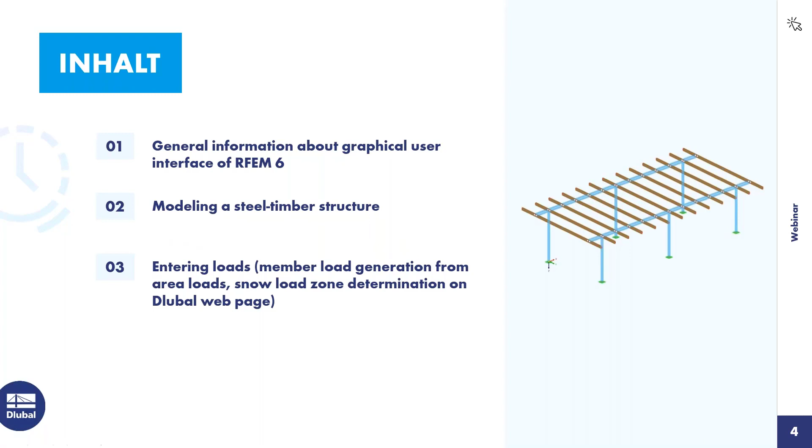Okay, then we turn to the program RFEM 6. I start left above, File, New. You can also use this button on the left side above. Then the first dialog, the base data, is opened. I enter a model name, I call it shelter or roof, doesn't matter. It's a 3D model.

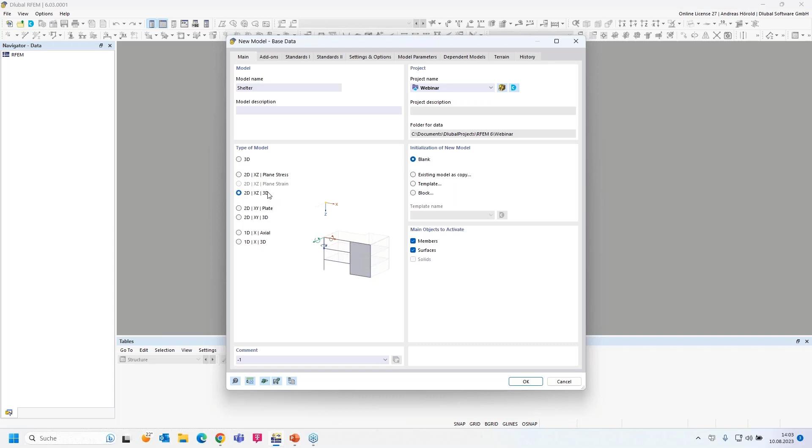New in RFEM 6 is the 2D model and the consideration of 3D internal forces. It's better explained with the 1D model. For example, with a 1D beam you can consider My or VZ, and with this new option you can also consider torsional moment and MZ. That's for users who already know RFEM 5 and are interested in RFEM 6.

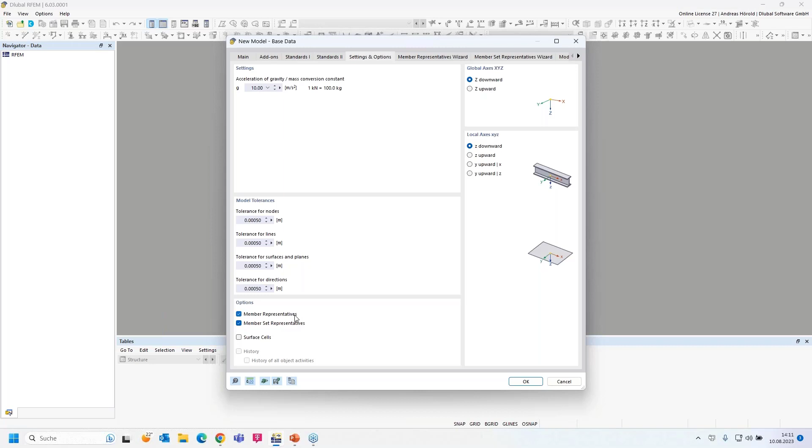Imagine we have got 6 columns, but we will design only one member representative, meaning only one column. In our case, we have got 3 columns with the same length, and that's why we have got one member representative for these 3 columns. But we will come to that later in the second part of the webinar.

So that's all the options for the member representatives. We want to use them for the steel design and the timber design. The same for the member set representatives.

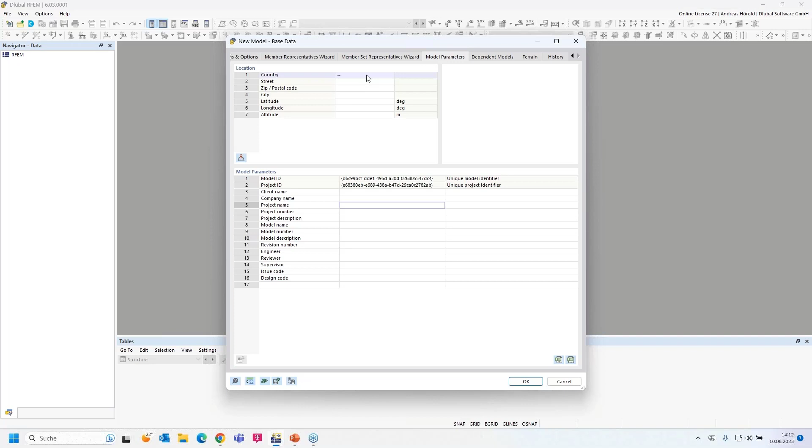So then we select the dialog member model parameters. You can see here the member model parameters. You can enter any text here. You can load the location of your construction to use it for the different load wizards, snow load wizard and wind load wizard. I will do that later in the program.

So then dependent model, it's not interesting today. And also the terrain, you can define different terrains. Then the history, it's empty at the moment because it's a new model. Okay, I can leave the dialog with OK.

And a new space for the modeling is available now. So for users that already use RFEM 5, you can see it's nearly the same interface, with more than some new functions. But if you want to create a node here on the left side, or a line, or a member, or a nodal support, that's the same workflow as in RFEM 5.

But what is new? That's the Dlubal Center. I opened the Dlubal Center. That is the project manager. Now you can see that's the current project, that's our empty model shelter.

I already tested it, that's the finished model, and those are the models from the German webinar that I presented last Tuesday. Okay, those are models from previous webinars. Or where are the examples?

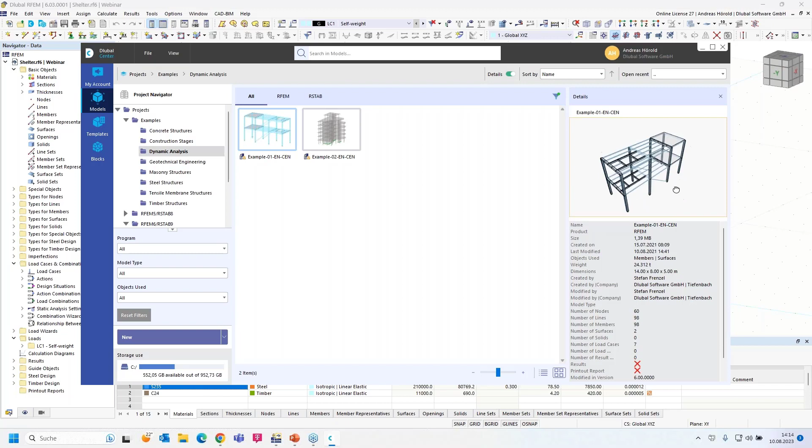For example, construction stages, dynamic analysis. You can see a 3D model on the right side here. Then the model information, number of results if you have got results, number of nodes, number of lines, and so on.

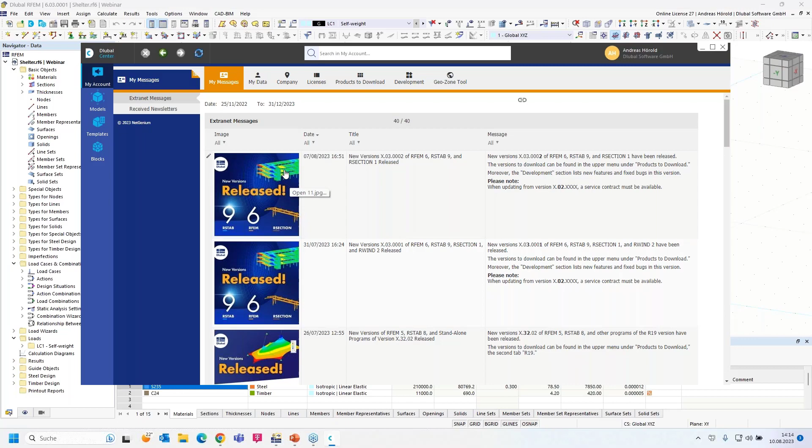So, okay, then we can turn to my account. Then the Dlubal extranet is opened with the extranet messages, your data, the company data, the licenses, products to download, and the new program generation, and also the old program generation. And what's quite interesting to you is the development page here, where are the implemented features.

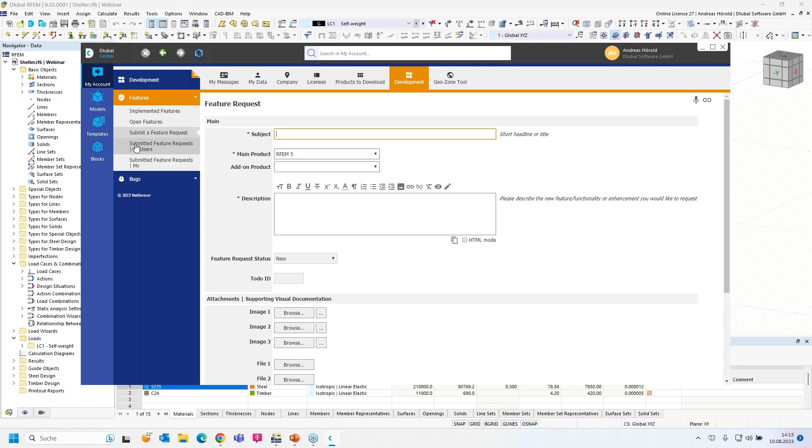For example, you can select for timber design, or display all, or concrete design, for example. You can submit a feature request. That's quite important to us, that you enter wishes here, so that we can make the best static analysis program ever for you, so that you can use all the features that you want. Okay, I leave the extranet.

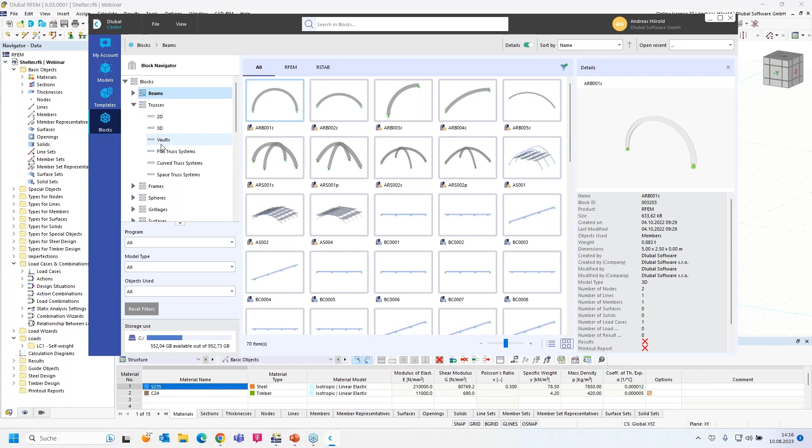I turn to the templates. I've got no templates, but you can save templates for your projects here. This is quite new, the blocks. Those, I've got also parameters, or most of them have got parameters. You can select trusses, 2D, 3D, or frames, tapered frames. What also, for example, stairway structure, steel and concrete, and so on.

Let's click on one truss, and you can see that the truss is parameterized. You can enter the values here, for example, 20 meters, 3 meters high, and you can select another section and so on. And you can import it in RFEM 6 or RSTAB 9 if you want. Just use such parameterized blocks so that you don't need to start at the beginning of such a model.

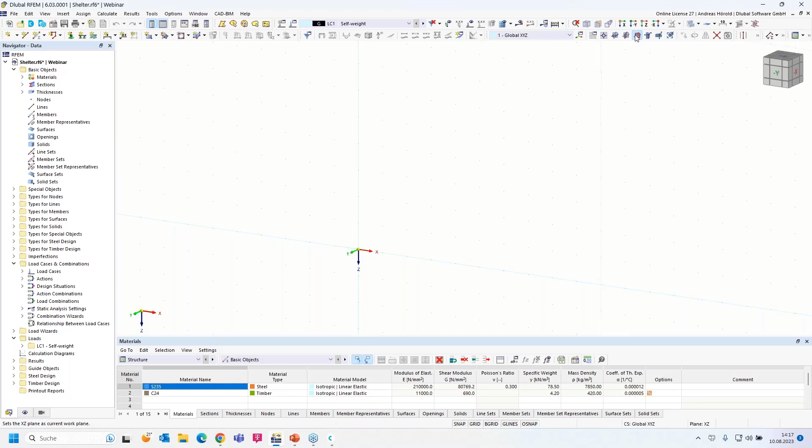Okay, then we start. On the right side above, I select another work plane, XZ, and I change the view in -Y direction. And I start with the first column.

Left above, here, new single member. I only have to change a new section.

Okay, that's already the section that's from the list that I want to use, but I show how you can find it. You can go here above in the library, and there are the standardized cross-sections, thin walled cross-section, massive, and so on. So I select the square and rectangular hollow sections.

And I select the square hollow section, 100 by 100 by 6.3.

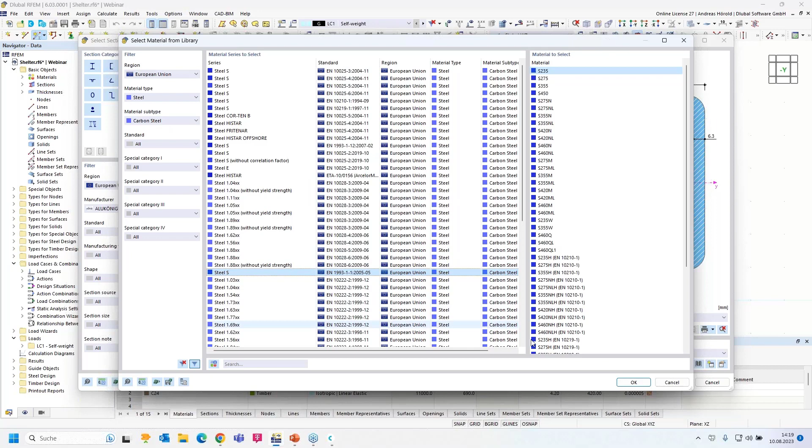And at the bottom on the right side I can choose a material. I open the library. There are a lot of steels available. You can choose the different region, material type, and so on, and then select your material. That's quite easy. Okay, so then all entries for the first member are done.

I apply all and create the first column, 3 meters high. Okay, then left above, I assign a nodal support.

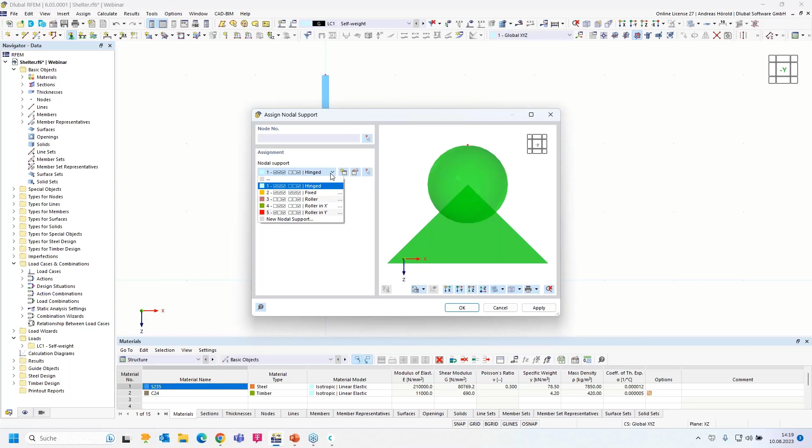There are predefined nodal supports, and I select the fixed nodal support. I press the Edit Nodal Support button, and this dialog has opened, and you can see that there are also non-linearities available, for example failure if positive, or a friction diagram, and so on, that you can define in the different directions for the support, or around a certain axis. Yeah, failure diagram, stiffness diagram, and so on.

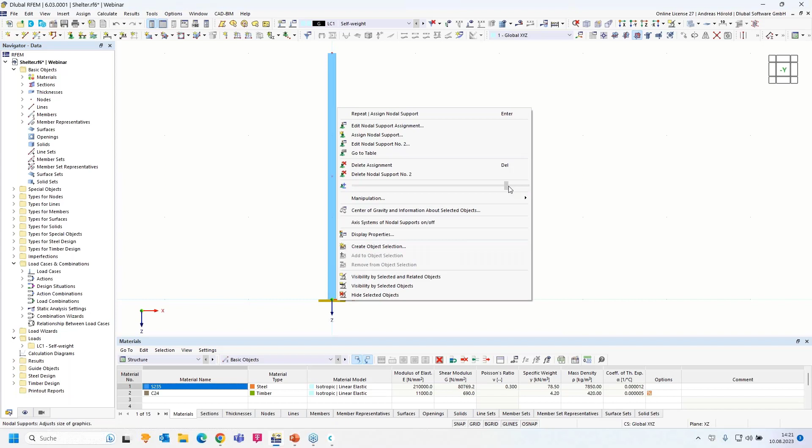So I apply that and select this node. So what's new in RFEM 6, you can click on it or select it and then right click, and you can decrease or increase the size of the support. It's also possible for loads, etc.

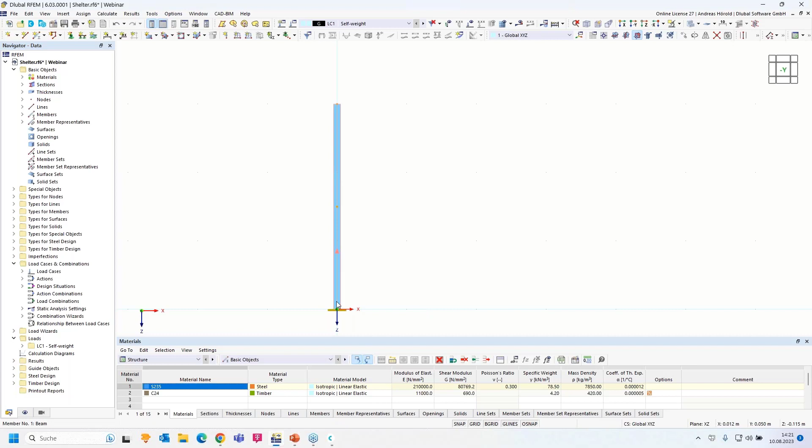So then via drag and drop, I select the column and then I press the Control key, and you see on the mouse you can see the plus sign. That means that I copy the column, and if I don't press the Control key, there's nothing - I only move the column. So, but I press the Control key.

And copy it 5 meters in X direction.

So then let's create the horizontal beam. I create a new single member, left above, section, new section. Okay, that's already the right section, but I added it so that you can see how you can find it in the library.

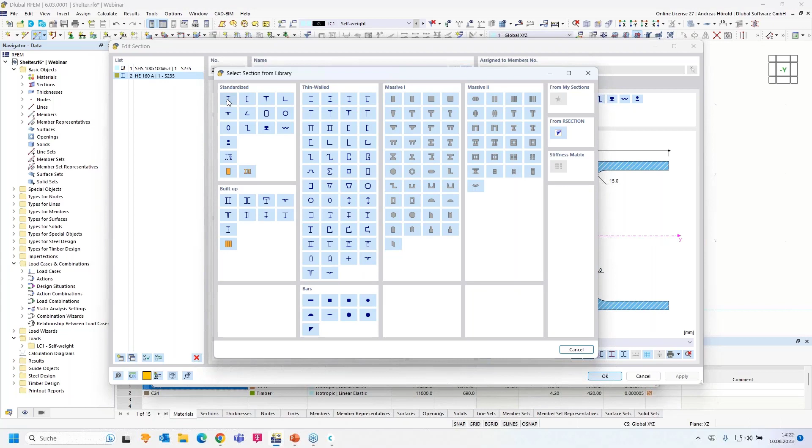Also a standardized cross section, an I-beam or H-beam, HEA 160. Okay.

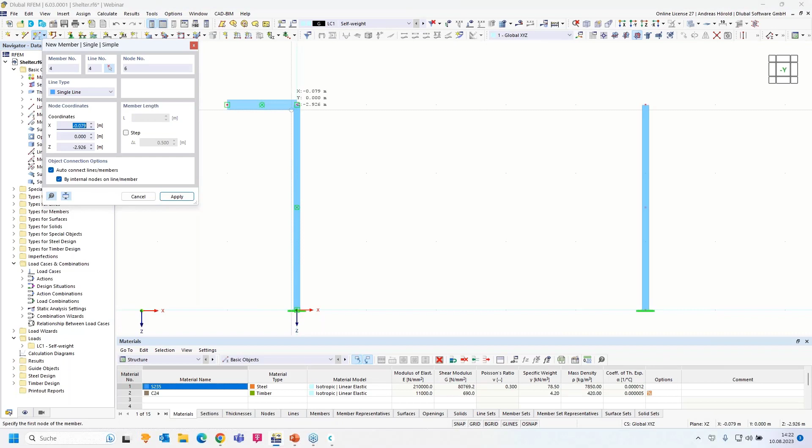So then the cantilever, this part. So, and I copy that part here, but you can see I select only this horizontal beam and this column, and also this column is selected because you can see those points, and those are the member representatives.

But as I said, we will use that in the second part of the webinar. That's why I go here left at the bottom and I open the display navigator and deselect the member representatives and the member set representatives.

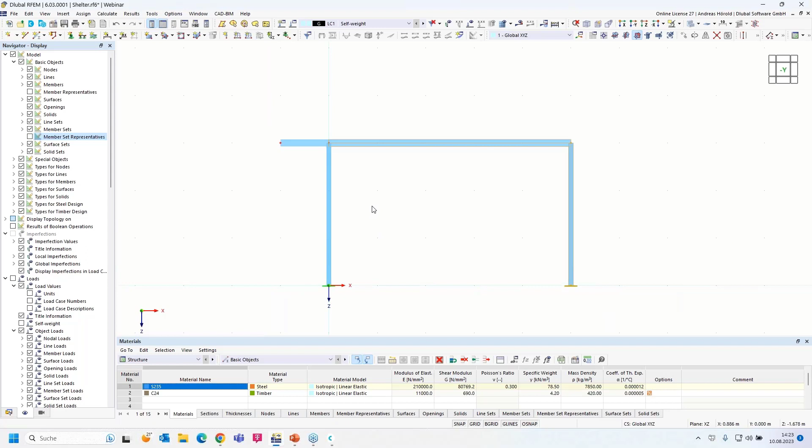So, and I select the horizontal beam and the column again. And this time we don't use the drag and drop function, but the move and copy function, right above, move copy selected objects. So I create a copy and I copy the structure 5 meters in X direction.

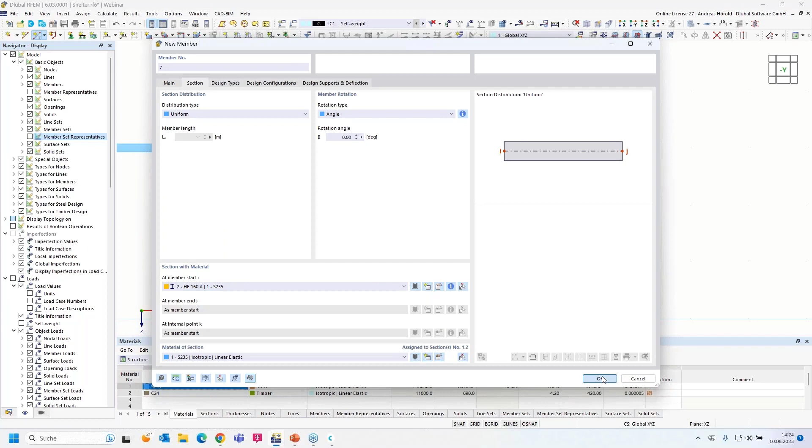Okay. I only add the cantilever here with a new single member, section HE 160A. Okay.

Now we have got 4 different horizontal beams, but later we want to design one member. That's a continuous member in the reality. That's why I select all the members.

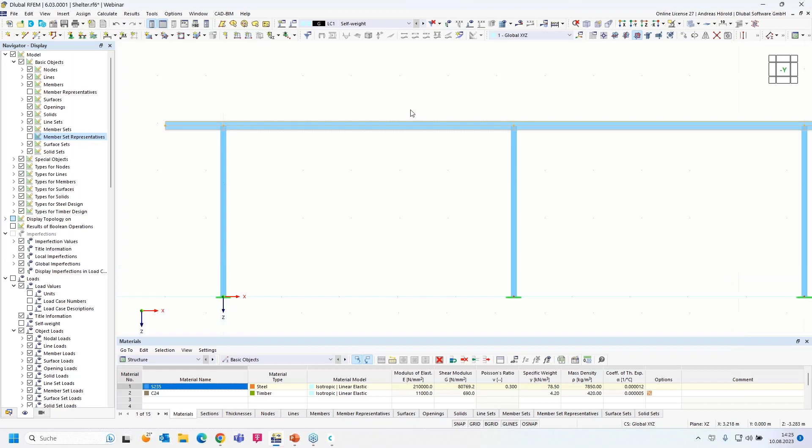It's also a function that already was available in RFEM 5. I do a right click, then members, and I create a member set. Okay, all these members are here on the right side, on the top. You can see that these members are included, and you can see on the pointed line here that that is the member set.

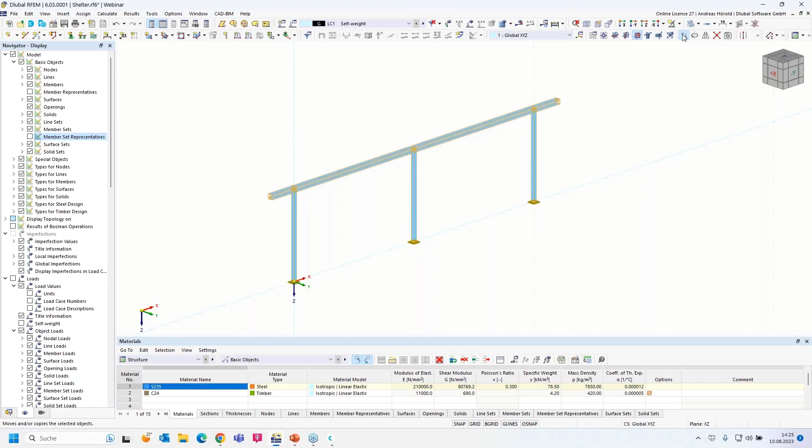Okay, so then I copy the steel structure 4 meters in the Y direction. I select all, then on the right side, on the top, the move and copy function - I create a copy and copy it 4 meters in Y direction.

So the steel construction is finished. We continue with the timber members. New single member, section. Now we've got 2 sections. I create a new section with the import button, as I imported from the section library, a massive rectangular cross section. That's the cross section. I go into the next dialog and enter the parameters.

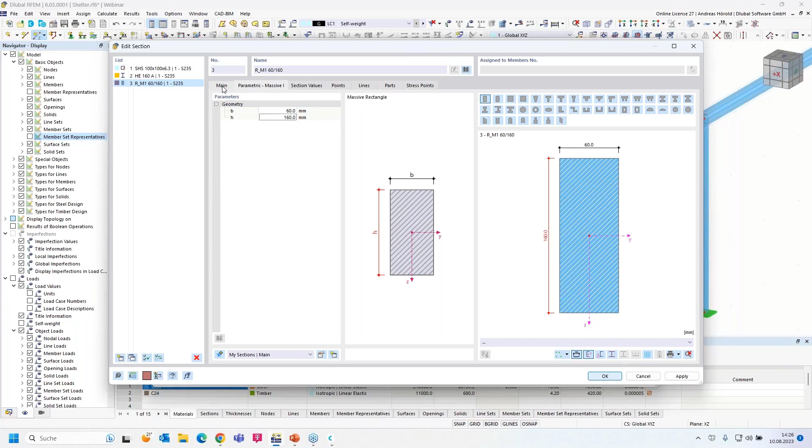60 millimeters as the width and the height should be 160 millimeters. Go back to the main dialog and you can see the material is not correct. I select the timber material - yeah, that's already the right material. I go to the edit button and the library.

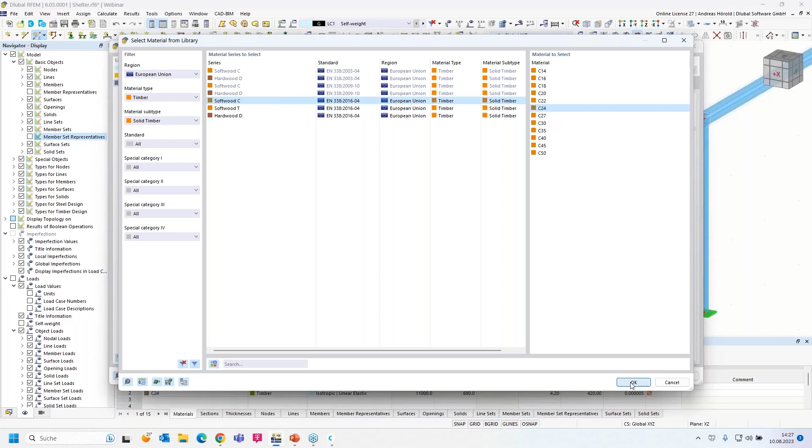Now you can select or choose the different filters: European Union, material type timber, material subtype solid timber, and then the softwood C24. Now that's the correct cross section.

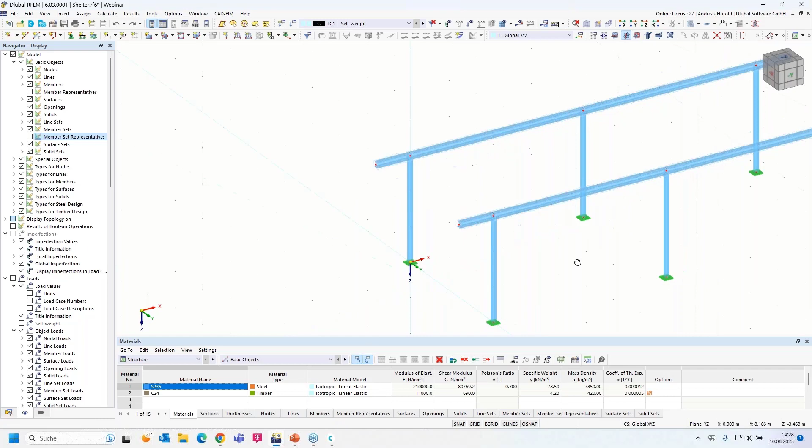So I create the first member. Oh, where's the rotation? Ah okay, that was my mistake, I undo that here above. So I have to change the work plane. I'm in the work plane XZ, I change it to YZ. Yeah, now you can see that's the right work plane.

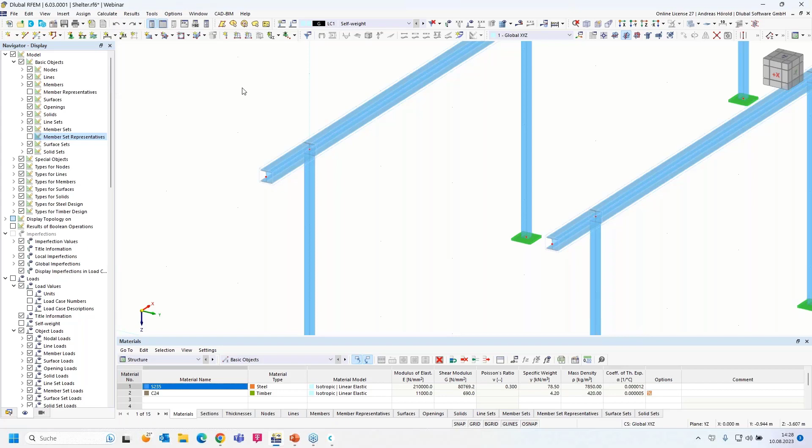But you can see if you make a mistake, you can undo that. You can also undo more than one step, and go directly to a previous step - all is possible. So, okay, again the timber member. Okay, all is correct. Three members.

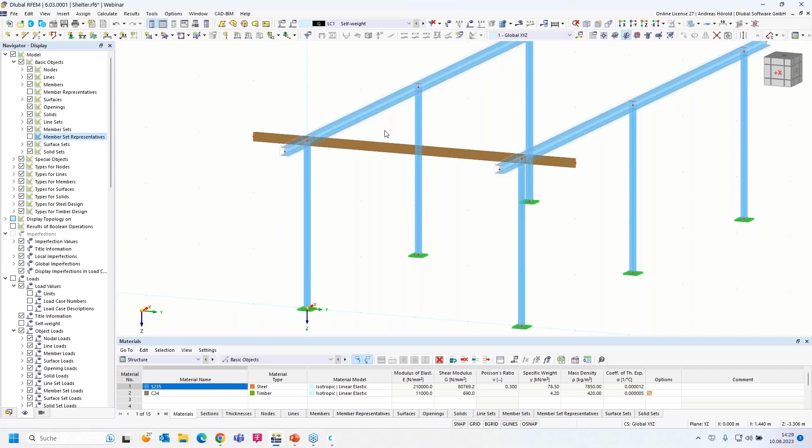It's in the same height or the same axis as the steel structure. In reality, the timber member will lie over the steel construction. Now, if you want to consider additional moments because of an eccentricity, then you can create an eccentricity. In the case of this structure, in my eyes that's not necessary, but I'd like to show how you can create it - or we can do that immediately.

So I select all with the control key - you can see the plus. Then a right click on one of the members, member, and then edit. I can select an eccentricity, go to the table eccentricity and create a new eccentricity. The relative to section eccentricity is available - RFEM5 users know that already.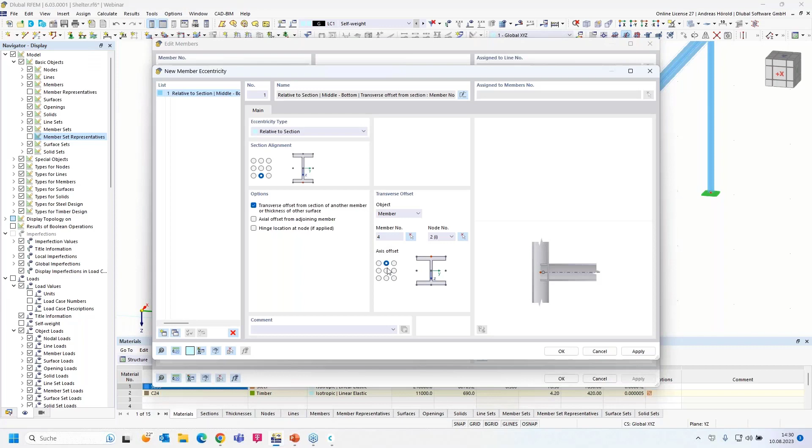I think the bottom of the timber member should be on the top of the steel member. I select the steel member - the same at the end. Now if you change the view to X direction, the eccentricity is correct. But I won't use that in this case here, in this webinar.

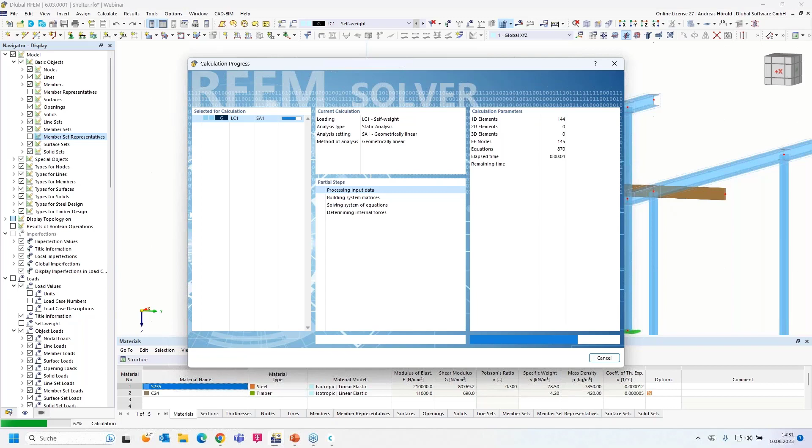So let's calculate the self-weight load case that's automatically created. You can see all is rigid here at that node, the timber members and the column for example, and you will have now a continuous moment picture. So let's take a look at the internal forces.

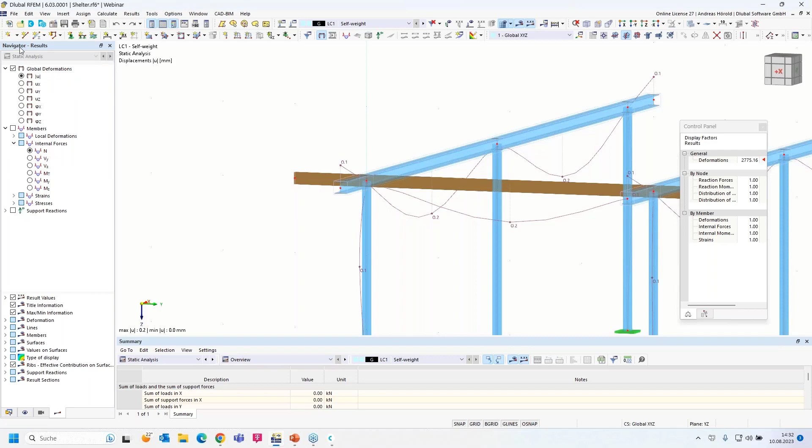On the left side you can see the navigator, results, MY. I'd like to display only the timber structure. How can you do that? On the left side, on the bottom, you can see the views, and you can open the navigator views, then activate visibilities - for example for members, members by materials - and select only the timber members. You can see there's a difference for the moment at this node.

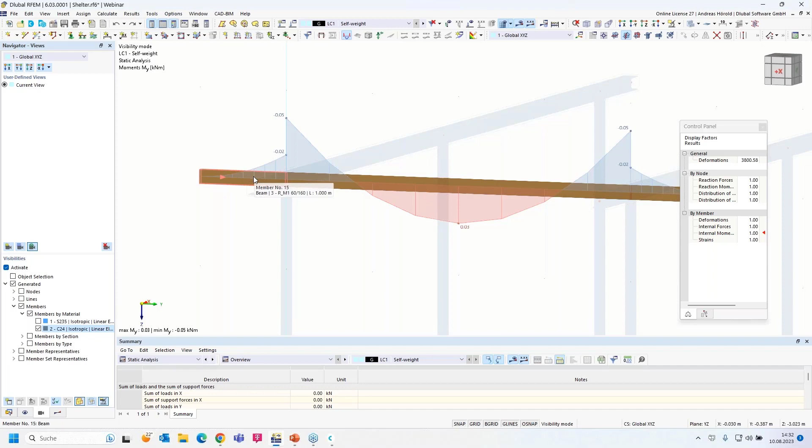And that's not correct. How can you solve that? Now, with a scissor hinge. So I create a scissor hinge, I select the member, I select hinges for the member, and go into the hinges dialog. With this button I create a new hinge at the member start. I have to change the coordinate system to global - I can create scissor hinges only in the global coordinate system.

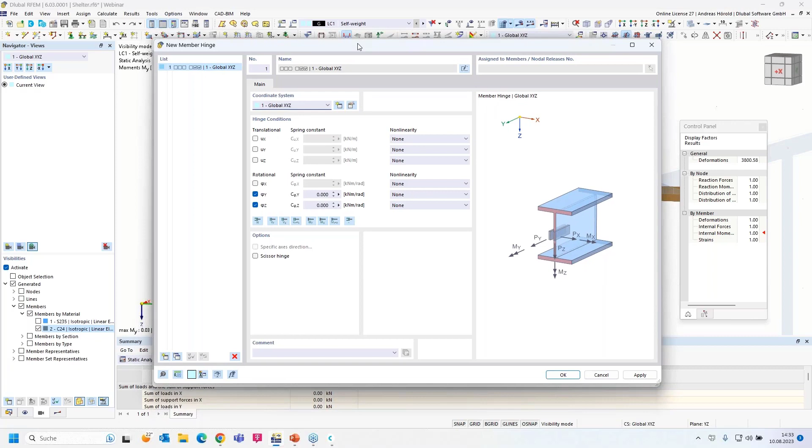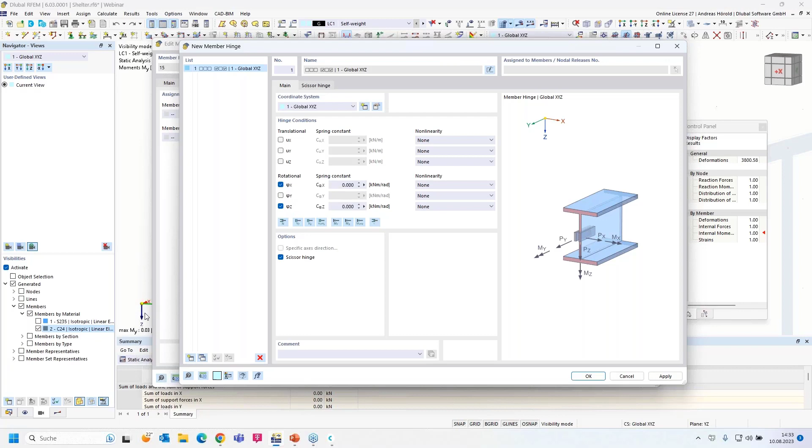So I select the scissor hinge - you can see the axes here: the green axis is Y, the red axis is X, and the blue axis is Z. The scissor hinge should be free around the X and Z axis. Okay, the same scissor hinge at the end - I mean only at the end, not at the start in that case.

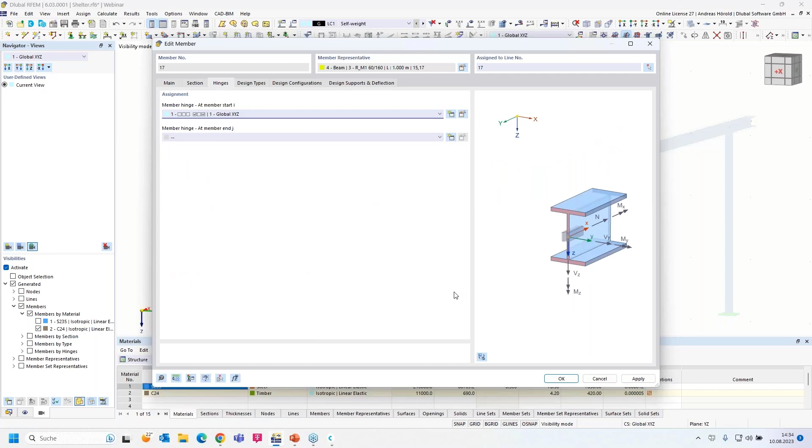I have to uncheck ignore related objects so that I can see the scissor hinge. Then I select the middle member and select the hinges, and choose the scissor hinge on both ends - okay, and at the beginning of this member as well. So let's calculate all again.

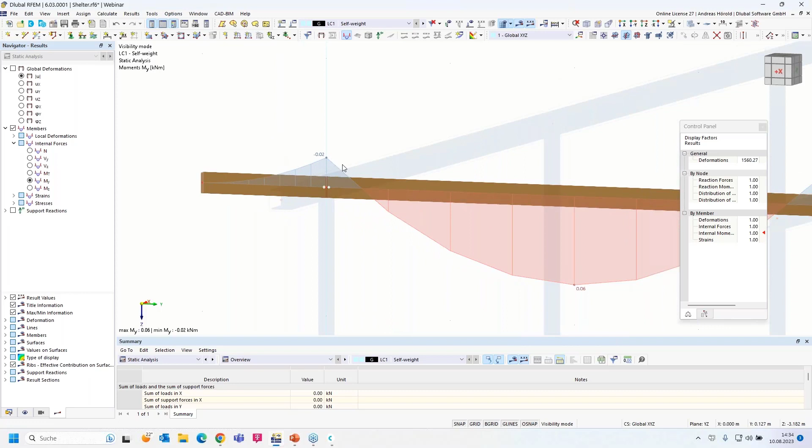So, and that's good - there's no difference at this node for the moment now. That's because the timber member is continuous over the steel construction. On the top here, right, you can cancel the visibility mode, or you can go to the navigator, data navigator views on the left side at the bottom, and deactivate it.

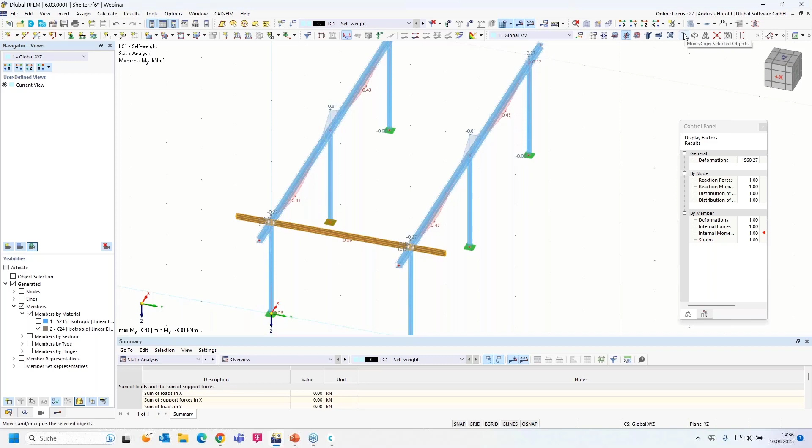So the next step is to copy all the timber members. I selected with the control key - now you can see the plus. I select all 3 members, and then on the top right side, the move and copy function: create copy 11 times and 1 meter in the X direction.

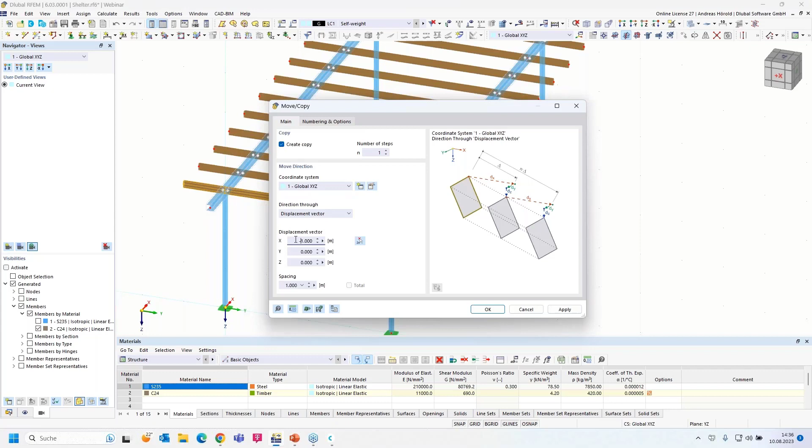All results are deleted, that's okay. I have to copy the member in the -X direction 1 time, using the same function, create copy, 1 time and -1 meter.

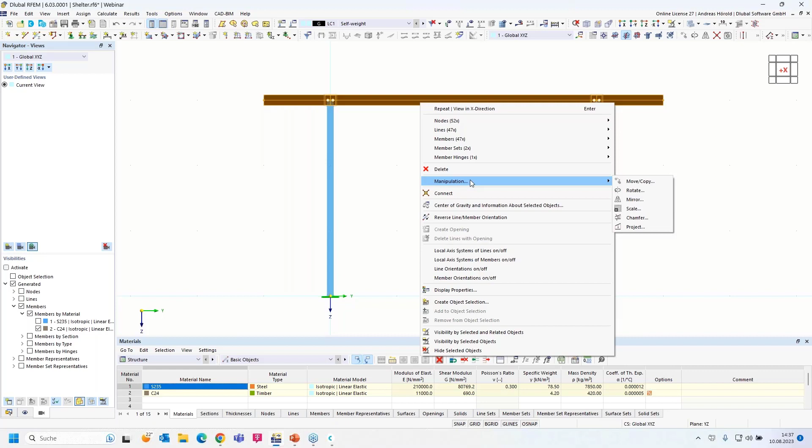The construction or the model is almost finished, but if we change to the X view, you can see there's no roof pitch. You could change the nodes, the height of the node, or set the coordinates of the nodes with trigonometric functions and calculate it, but it's quite easy in RFEM 6 and RSTAB 9. You can select all the members, then right click and go to manipulation in the context menu, then chamfer.

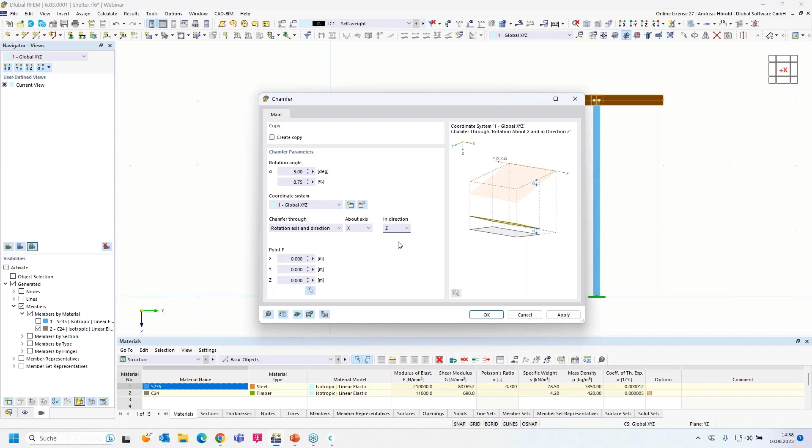You can enter a rotation angle in degrees or in percent. If I enter the degree value, the percent value is calculated automatically, in the global coordinate system. I select a rotation axis and a direction. We want to do the chamfer through the axis X - that's the axis we're looking at the moment - and in direction Z. Then I have to select the rotation point. Apply, and now we have got a roof pitch.

So that's the completed structure.

Later I will apply the loads, for example also the wind load, and according to the standard, when I have wind in the Y direction, I have to load half of the roof. That's why I create a so-called help node in the middle of that member. I right click and open the context menu, member or members, and divide the member into n intermediate nodes - 1 node - and that's a new function in RFEM 6. I can create an on-member node without dividing the member. Now you can see the nodes, but the member isn't divided.

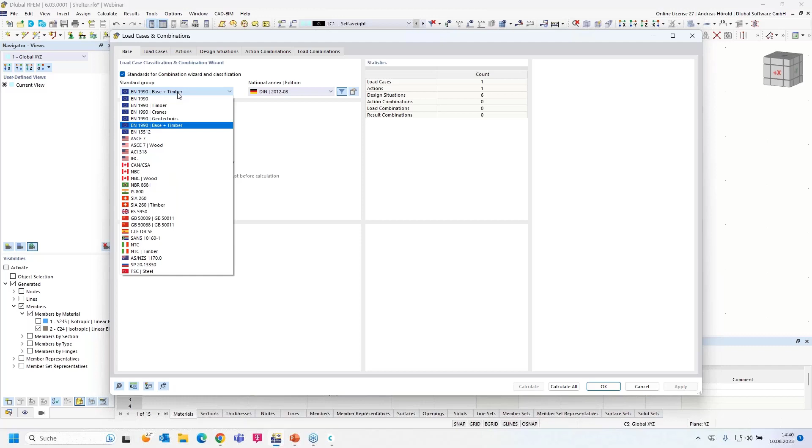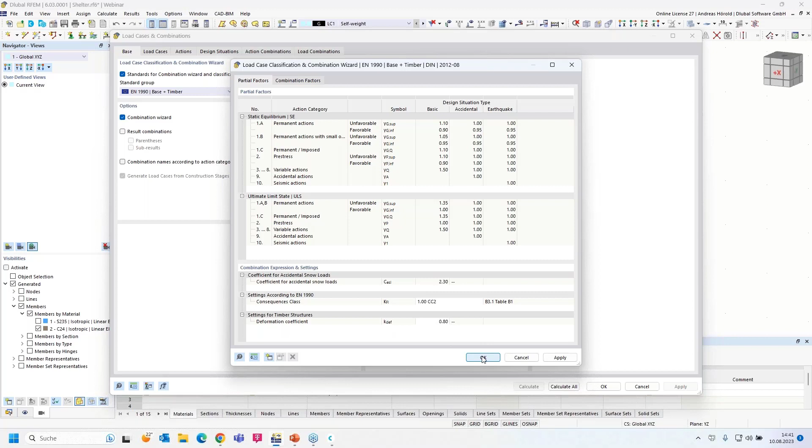As I said, the self-weight load case is already created. We can press this button, edit active load case, and the main dialog, load case and combinations, has opened. Those are the base data we defined at the beginning - we selected the base and timber standard group and the German national annex. I forgot to select something in the base data dialog, but I can do that here as well. I added the parameters of the national annex, and I select another deformation coefficient, KDEF 0.8, because we've got service class 2. We will also use the combination wizard, but we'll come back to that later in the second part of the webinar.

So, load case 1, self-weight. The action category is permanent, that's okay, and the self-weight of the structure is already activated.

Then I turn to the feature insert, on the top left, insert load wizards, and you can see there are 5 load wizards available: member loads from area load wizard, member loads from free line load wizard, you can transfer support reactions from one model to another model, and you can choose the snow load and wind load wizard. We will use the first load wizard and the snow load wizard later.

Okay, I start with this load wizard. Self-weight, the load distribution should be uniform, in the global coordinate system, and the load direction should be set - that's correct, and you can see it in the display, that's the right load for self-weight. So the load magnitude should be 25 kilogram per square meter, for example a formwork or a plate of timber with a foil over the plate or formwork, which can have a weight of 25 kilogram per square meter.

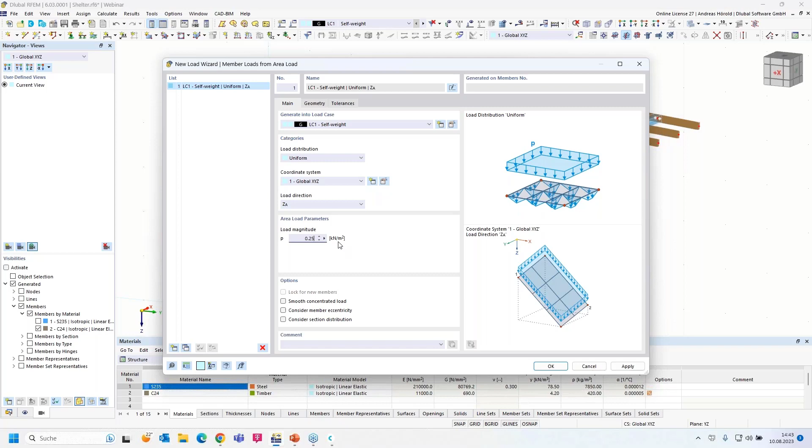I have to select the geometry, and with this button I have to select the corner nodes. So I select the 4 nodes and the start node.

And this function is also already available in RFEM 5. I can exclude members from the load, and I select members parallel to straight member number, this member, the steel member.

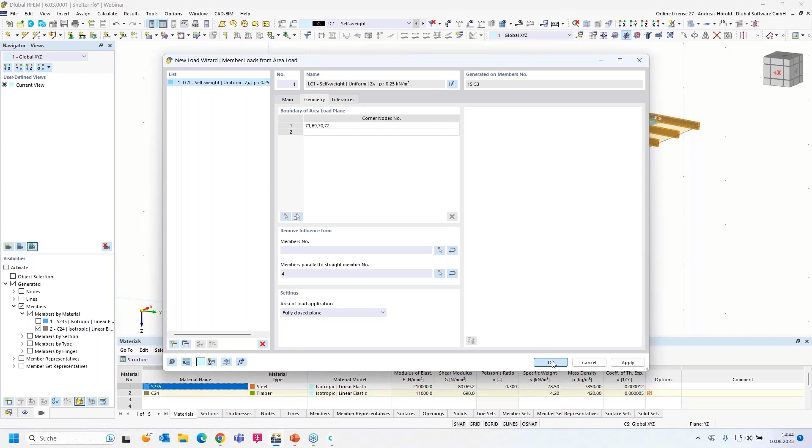Okay, so that's the load, and I can right click on it and display the load separately, and you can see the load, or the line load, is correct - 0.25 kilonewton per meter and a half on the edge beam.

So I can display it not separately. I open the context menu again, and you can see that I can increase or decrease the display of the load in the context menu.

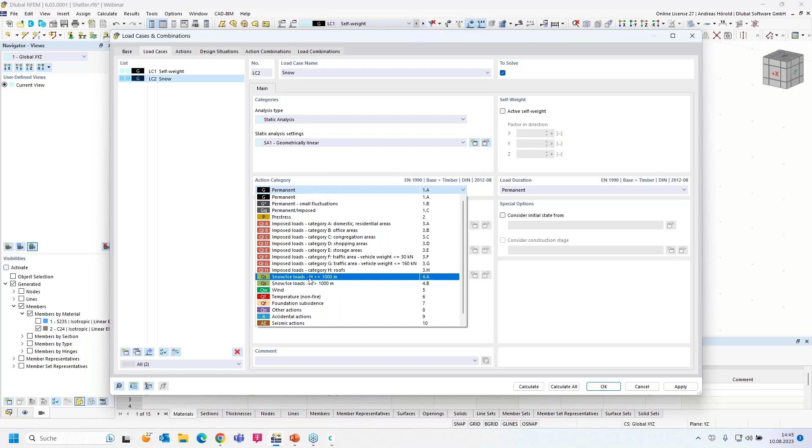Then we create a new load case with this button here, new load case, and the new load case is snow. I have to change the action category - you can see there are, for example, imposed loads, the wind load, snow load, temperature, and so on. We select the snow loads with a height under 1,000 meters.

Then I insert the next load. Insert, I use the load wizard, the snow load wizard.

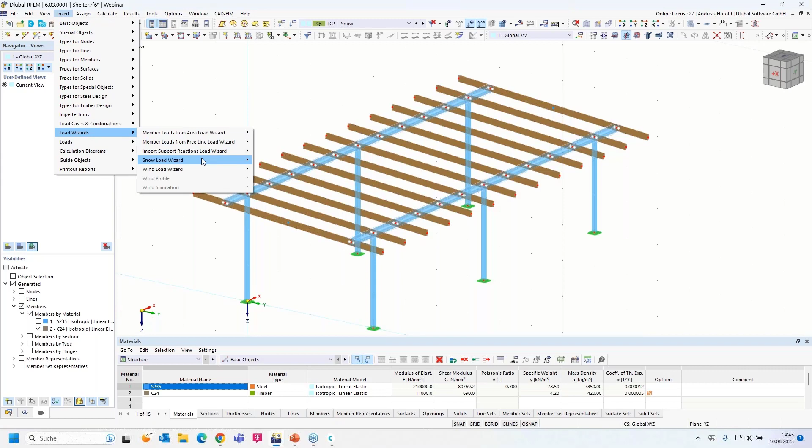So you can select the roof type, dual pitch or flat mono pitch. We have mono pitch roof. I select the 4 nodes.

Okay. I exclude again members from the load. Now with that button here, select parallel objects and graphic, also the steel member. Okay.

So, and then we turn to the next dialog, the parameters. You can define the snow load with the map and parameters or user defined. Now you can select the load zone, the altitude, the characteristic snow load. In this webinar, we would like to use a map.

Left on the bottom, you can see the import button here, import location. I select it or I press it. And then this map is opened. Maybe you know that from our website. Now it's connected with our website. And you can enter the location here.

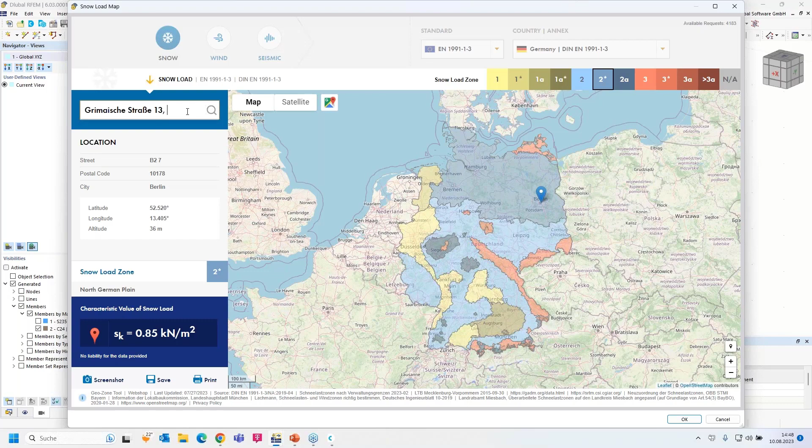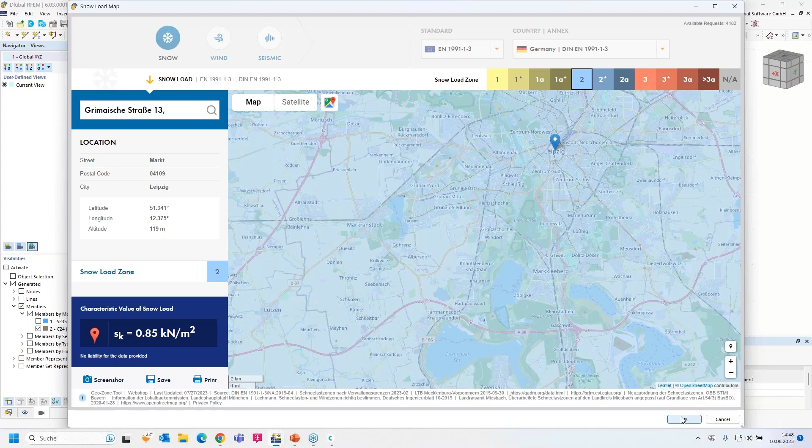Okay, it doesn't matter. I search it in the map. I select a location in Leipzig and you can see the snow load zone and the characteristic value of the snow load. The height is also quite okay, and I can press OK. And all the parameters are transferred in the program. Load zone 2 and the characteristic snow load of 0.85 kilonewton per square meter.

One load case is available. We created it previously, so now I press OK, and the load is visible.

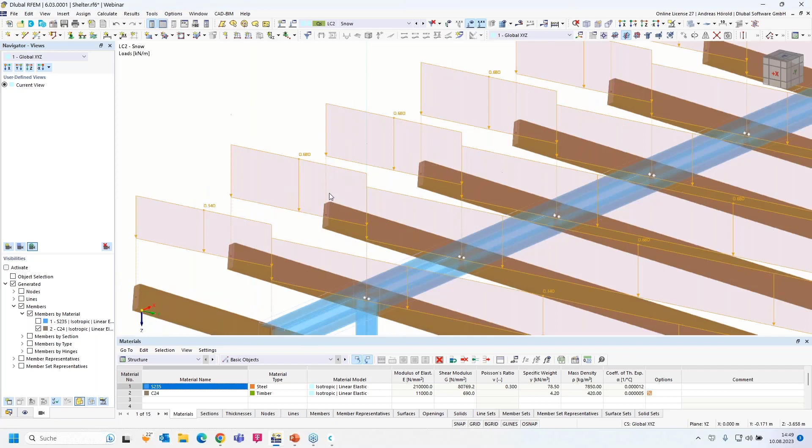I can increase it a little bit and can display it separately. And you can see it's quite okay. The steel members don't get any load. So...

Then we can create the next load case, the wind load case. I do that another way. I open the navigator data, left on the bottom. You can see the button here. You can see the load cases, the load case and combinations.

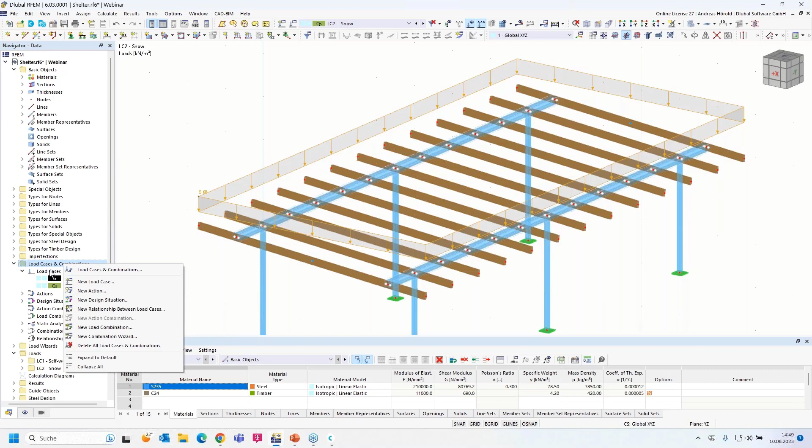You can open that with a right click, or you can right click on the load cases and press new load case. A different possibility to reach the dialog. Often in RFEM 6 and RSTAB 9, you've got more than one possibility to reach a dialog.

So I call it wind y, pressure. I have to select the action category, wind. Okay. And I can leave the dialog.

Yeah, according to the standard, for the wind in Y direction we have to consider a load in the corner of the roof in the direction plus Z, downwards, and a load upwards in the corner. I think that single load should be on the half side of the roof.

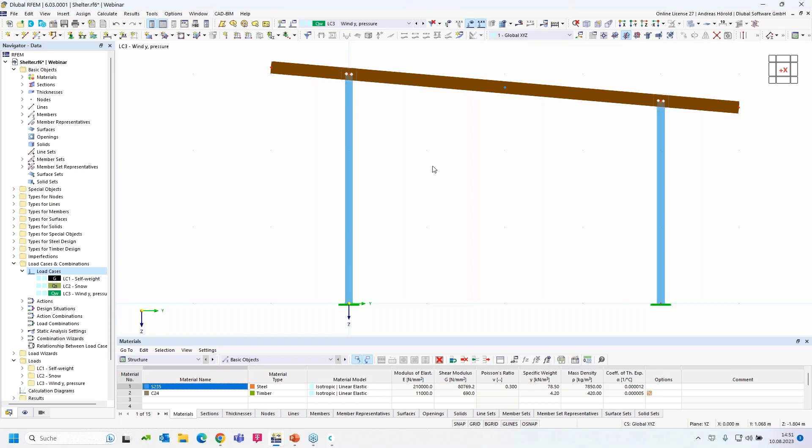So that's why on the left side above, I insert a load with the load wizard, member loads from area. That's the wizard that we already used. I change the coordinate system to local, and the load direction should be perpendicular to the plane. And you can see Z perpendicular to plane of the area.

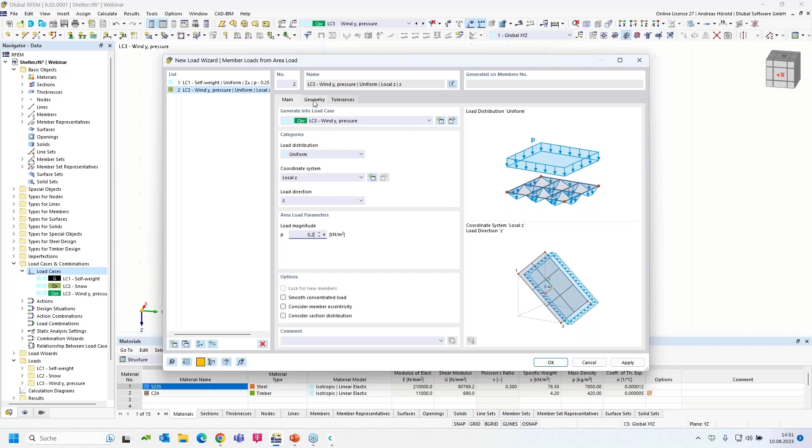So, and the load magnitude should be 0.2 kilonewton per square meter. I have to select the geometry. As I already mentioned, the half of the roof. I distribute the single load from the standard to the half of the roof.

I exclude the steel members again with that button here, members parallel to straight members number. Okay, I have to select the steel member and can press OK. We can display the load separately. That's okay.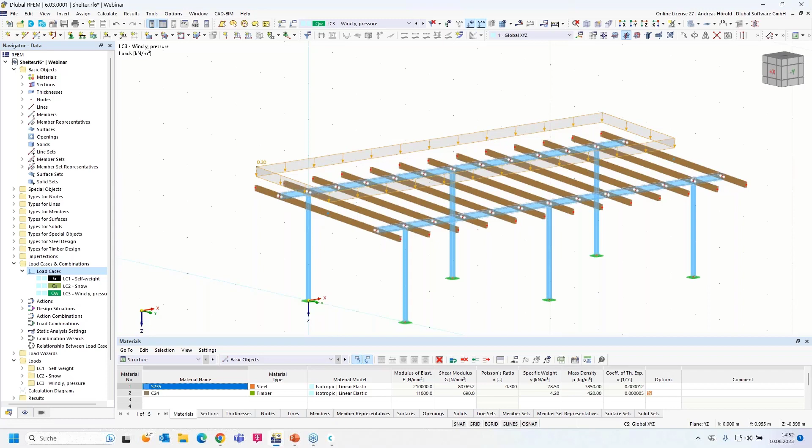So then the wind load on the members, I select all the members, and then above here, new member load. Force, uniform. You can see the different possibilities, what is available in RFEM 6.

Then the load direction should be Y. And the load magnitude 0.1 kilonewton per meter. Oh, that was wrong. 10 kilonewton per meter.

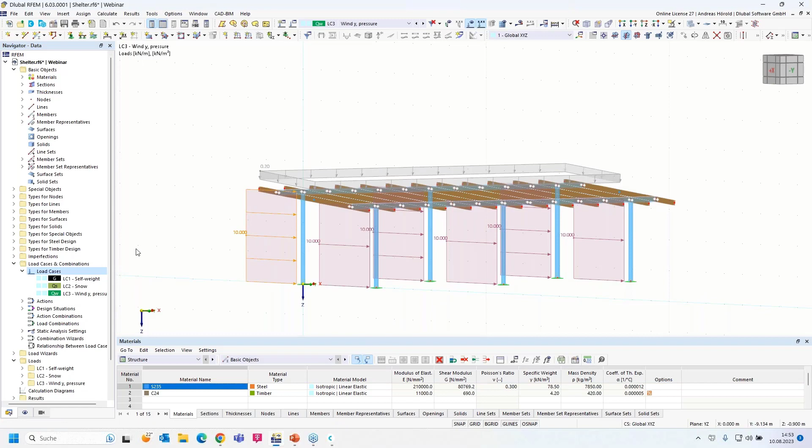Yeah, you can undo that, but you can search the load in the navigator data. You can see the loads here. Wind, pressure. Where are the member loads? Those are the loads from the load wizard, and you can click on the member load here. I selected 10 or entered 10, but it should be 0.1. Okay.

That's a possibility to change a load if you have a mistake, as I did. You can also select the loads with the control key and then double click on it, and then you can also enter the load. Okay, so one load is missing.

In this example, I would like to define a wind stripe with a height of 1 meter, and I applied it on the steel member. That's why I go in the navigator views. On the bottom left side, I select the steel construction. Then I go to new member load on the top, in Y direction, that's okay.

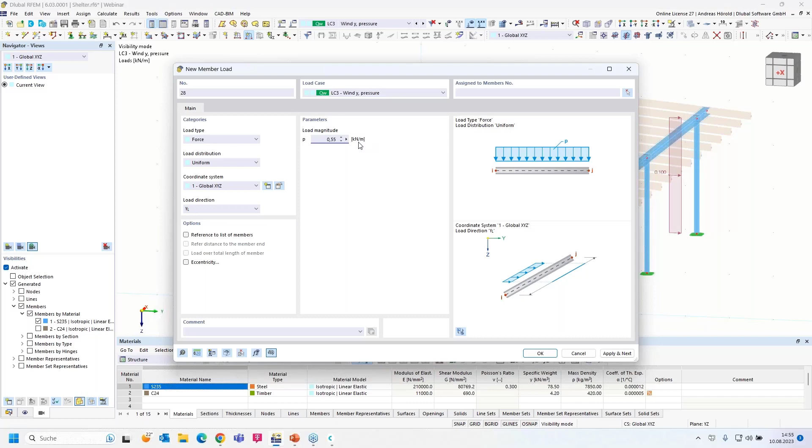0.55 kilonewton per meter. I select the horizontal beams. That's all for this wind load. I cancel the visibility mode.

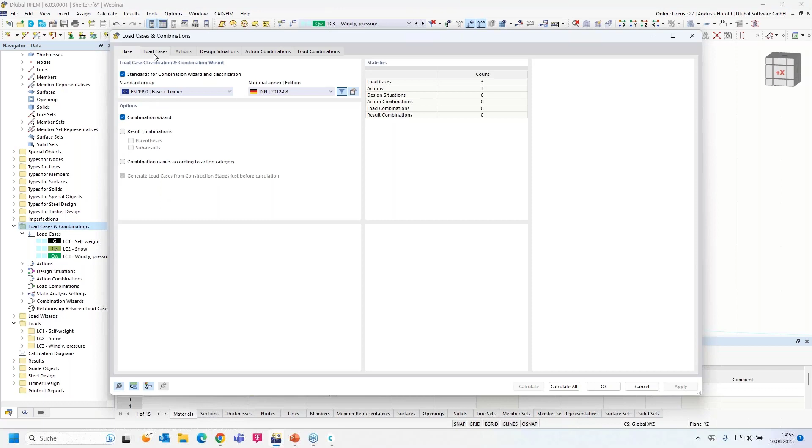So then I go to the load case and combinations. I open the dialog, then load cases. I select load case number 3, and on the bottom left you can see the copy selected load cases feature. I press it, then I rename it from pressure to suction.

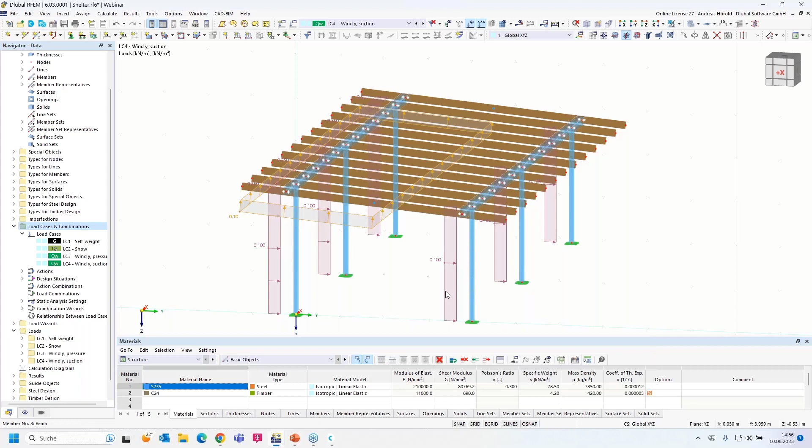I leave the dialog, and I only have to double click on this surface load and change the value to minus 0.1 kilonewton per square meter. That's the load case number 4. Load case number 3 and 4, according to the Eurocode.

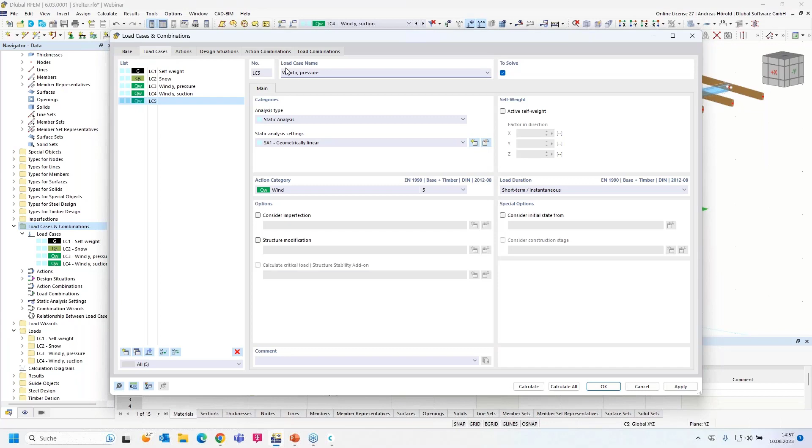Only 2 load cases are missing: the wind in X direction pressure and wind in X direction suction. I create a new load case, this time with this button on the left side, new load case. I call it wind X pressure.

And then the same workflow, I'll go through it a little bit quickly. I insert load wizards. Load direction, local z, 0.1.

The geometry is this half of the roof. And I click the members that shouldn't get any load. Display separately, all is okay.

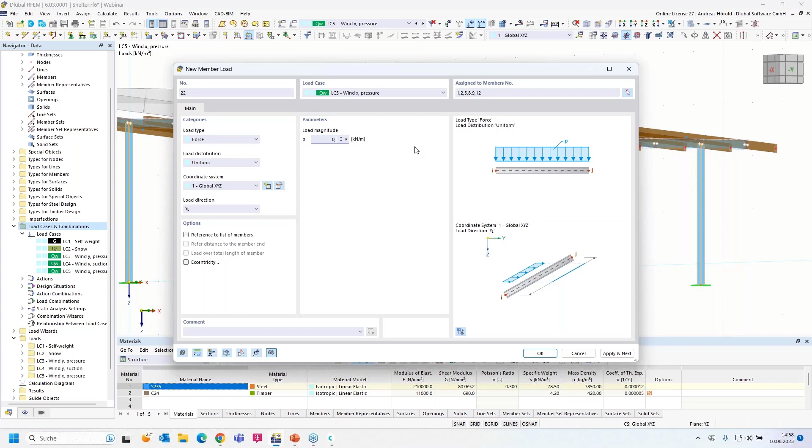So then the load on the columns, member load, 0.1 in X direction. Okay.

And I would like to apply a wind stripe of 1 meter high on this side here, but I want to apply it to the timber member because it would get bending around the weak axis, but I have a stiff plate over those purlins of timber.

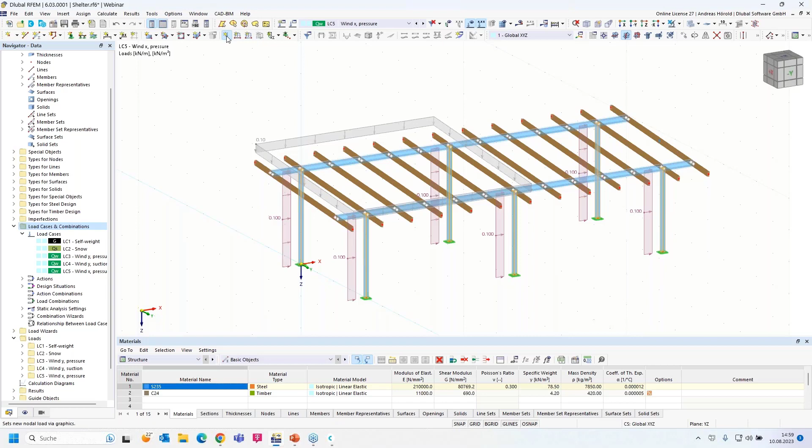That's why I apply the load as single loads. So, new nodal load in X direction, a force. You can also apply loads as components and so on. Force in X, 1.6 kilonewton, on this node and this node. Okay, that's all.

We go to the load cases dialog and I copy that load case again, rename it to suction, and I change only this load, this time to minus 0.2 kilonewton per square meter.

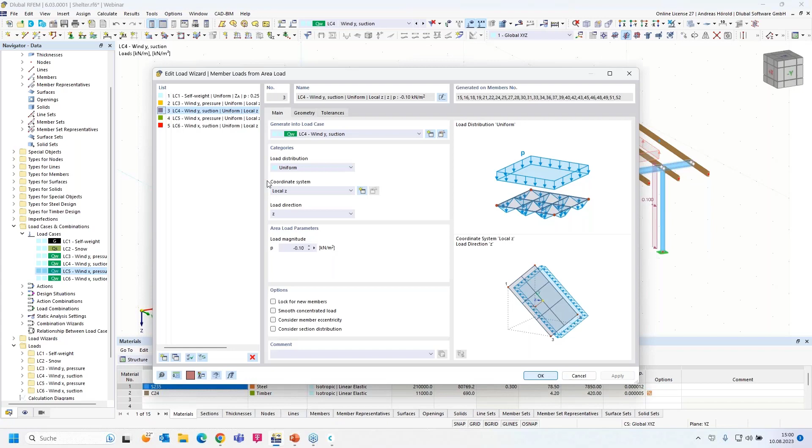Let me check all the wind load cases. No, that's not correct, sorry, load case number 4. Okay, that's not correct either, it should be 0.53 kilonewton per square meter.

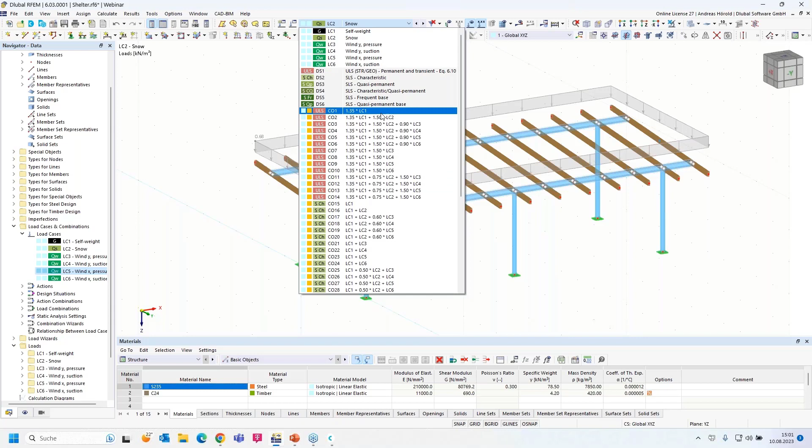So then 0.1. Okay, yeah, that's all. Let me display also the self-weight load case and the snow load case. All load cases and also all combinations are created, because we checked the combination wizard, but the combinations are a topic for the next webinar.

That should be all for the modeling for this webinar. Let me turn back to the PowerPoint slide.